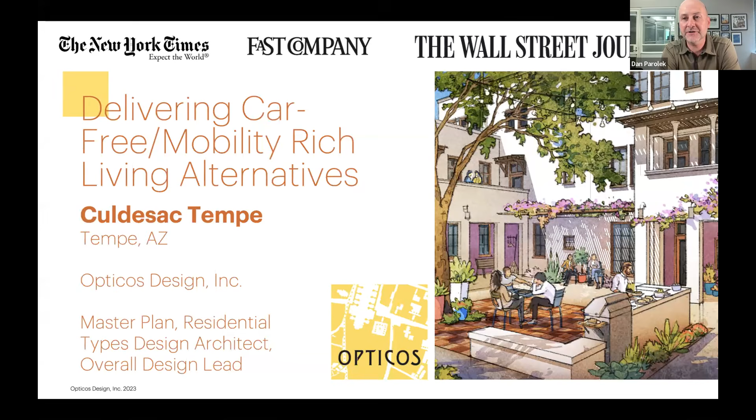Kudos to Ryan Johnson and Jeff Behrens, the founders of Culdesac, for having this vision to not just create a car-free neighborhood like we did in this and Eric's doing in Atlanta, but they have this much bigger vision of actually delivering a car-free city ultimately, which is really exciting to think about.

I'm actually going to start with a video, and I think this should work, because this project is becoming a reality. This is a video from about a month ago, so I thought this would be good to show so that people get a good sense of the overview of where the project's currently at. It starts with this view over the Smith Martin Light Rail Station at the mixed use center of the project.

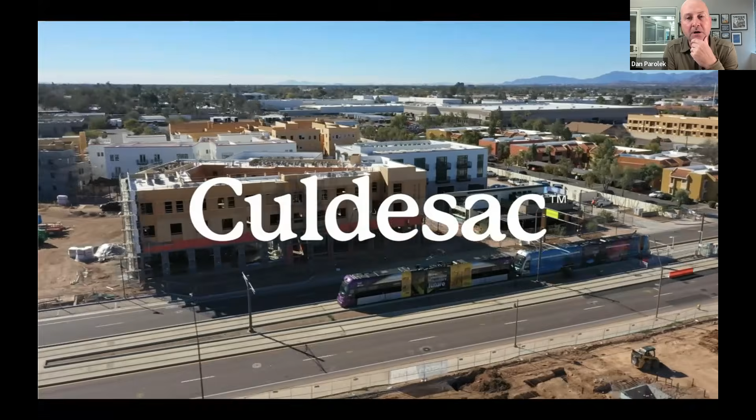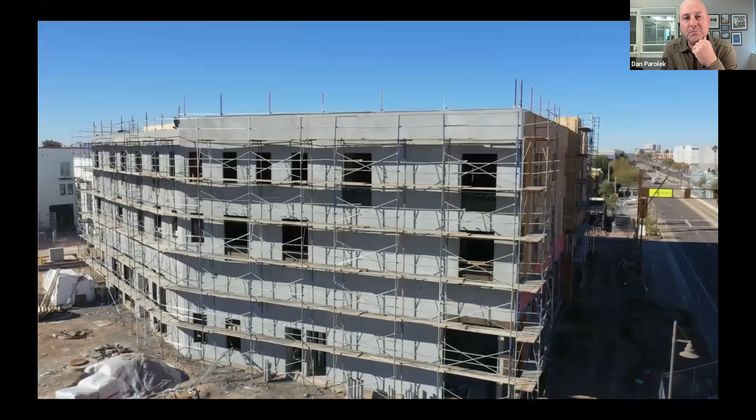The 3 mixed use buildings from the original plan are mostly completed. One of them will be occupied sometime in the next month as the first residents start to move into the project. The project is about 2 miles from downtown Tempe, which is also where ASU's main campus is.

The restaurant in this image is actually Cocina Chiwas, and it's now open. I had a wonderful dinner there last week at a ULI conference in Phoenix and met the chef. This building will have an 8,000 square foot market on the ground floor, occupying that space sometime in the next couple of months.

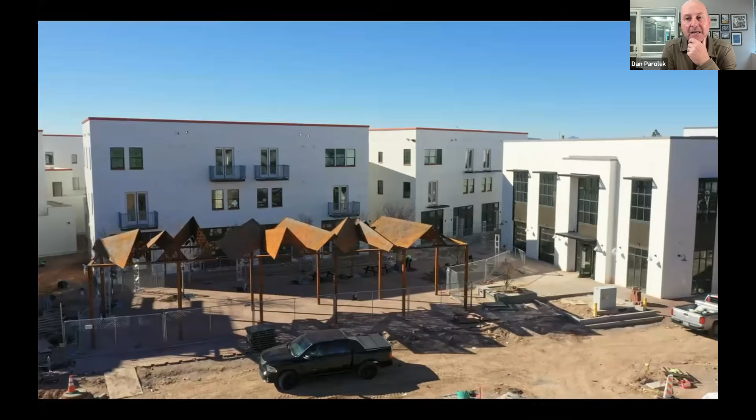You'll notice the architecture is purposefully restrained, and I'll talk more about that in my slides. This is the main plaza space with the beautiful shade pavilion done by a local artist. These are the live-work units.

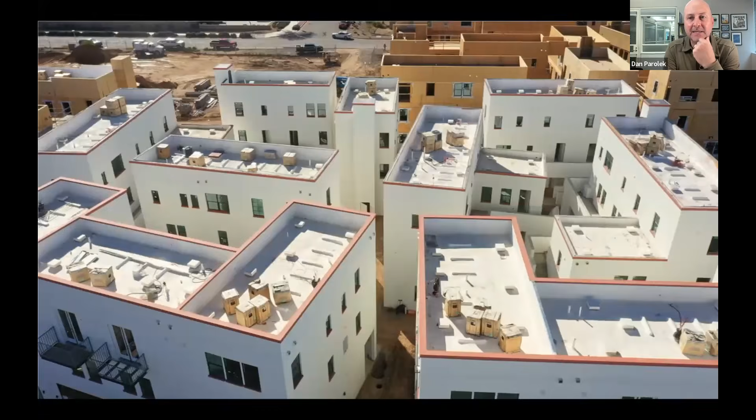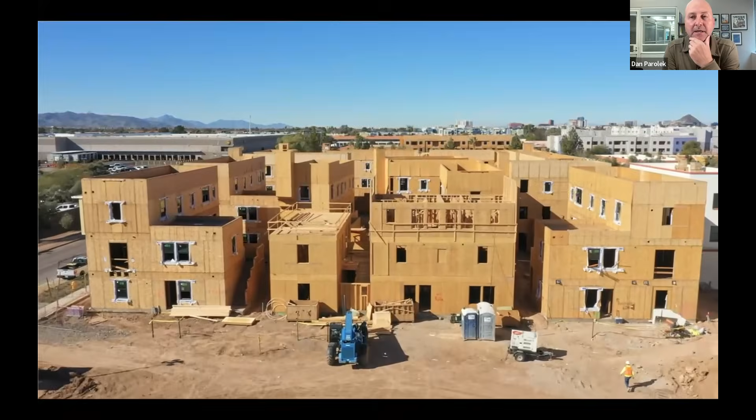This is just an image going into the inner block courtyard spaces, which are really starting to feel fantastic. The trees were starting to be put in last week or two weeks ago when I was out there, so it was really starting to feel like the images and the design intent that our design team had.

Local artists are a really key part of the programming, reinforcing the creative environment and sense of community in this project. So you can see...

I'll give you some of the numbers, but the first couple of phases are almost completed, and as I mentioned earlier, the first tenants are going to move in. I have this broken down into a series of about 4 sections.

The first one is just the idea, and I won't take credit for it. This is Culdesac, Jeff and Ryan's big idea, and these are a couple of slides from them. Creating a built environment designed from the ground up for shared mobility. Car-free is often how we frame this conversation, but 'mobility rich' is another great way to be thinking about and communicating it.

One of the really amazing things the Culdesac team has done to deliver this mobility-rich living experience is establish partnerships with local mobility companies and agencies, delivering up to about $3,000 in annual value or discounts for their residents - discounted Lyft memberships, discounted transit passes, discounted car share, and bike and scooter share. It's amazing they're thinking this way, not just providing car-free living but actually delivering those mobility choices to residents.

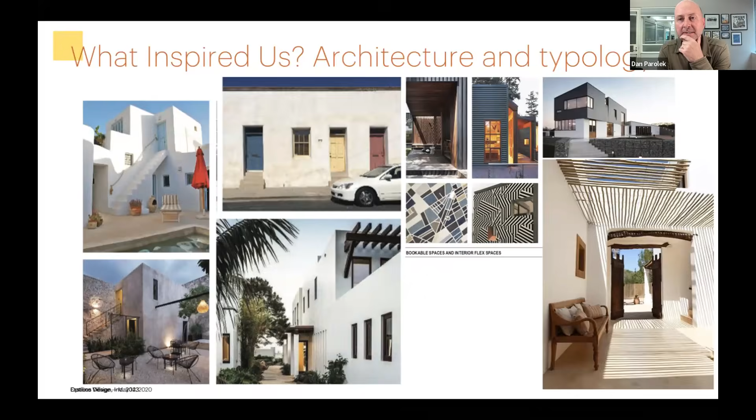I wanted to show this because I discovered this architect, the Egyptian architect Hassan Fathy - our team did - just really beautiful, desert-responsive buildings that we studied as we explored this project.

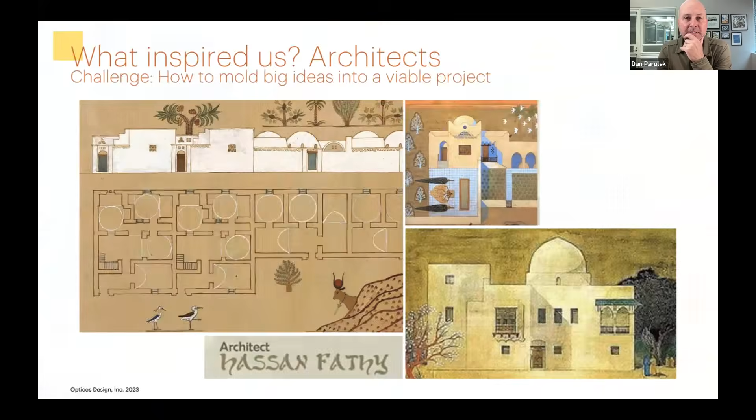From an urbanism standpoint, I think the really narrow, informal, organic, pedestrian ways that exist in all historic communities around the world, and really thoughtful public spaces that respond to the desert climate.

The team also gravitated toward really looking at this trend of beautiful painted signage and public art to reinforce a strong sense of place and a brand for the project.

In terms of the desert-responsive urbanism, obviously in a place like Phoenix with such an extreme climate, it makes complete sense, especially when you're removing cars from the equation, that the urbanism responds to that extreme desert climate.

The project site is about 16 acres, with just a little over 600 units - so 40 dwelling units per acre. It would have been really easy for Culdesac to say, hey, we want to double that and go up to 5 to 7 stories.

Their vision for this project, started 4 years ago, was a 2 to 3 story walk up neighborhood, and we were easily able to achieve that 40 dwelling units per acre in a combination of 2 to 3 stories. There are 0 residential parking spaces, but there are parking spaces for the commercial and food and beverage tenants in the project.

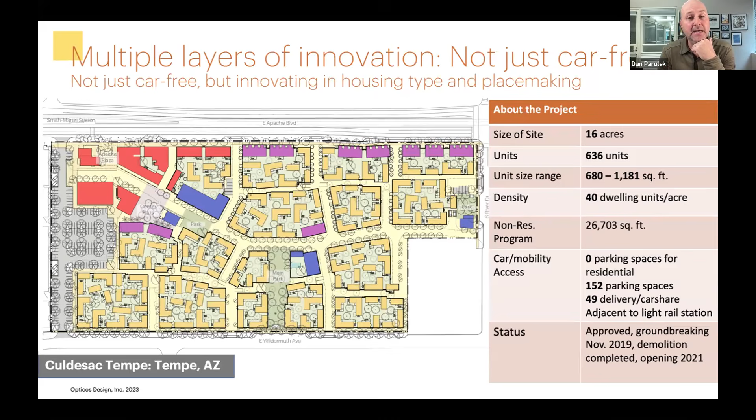One of the organizing elements of this plan is this primary paseo that goes east and west. That was partly driven by the location of existing utilities from previous structures on the site, but also driven in terms of its width by fire access and emergency access to the project area.

I'll show you a diagram of the emergency access plan, but we delivered about a 60-page document to the fire chief to walk him through how each one of these buildings would be accessed in case of a fire. You can see the really organic block typologies, and I'm going to talk more about that.

The narrow paseos deliver what we call a series of theatrical events as you're walking, biking, or scooting your way through the project from one end to the other.

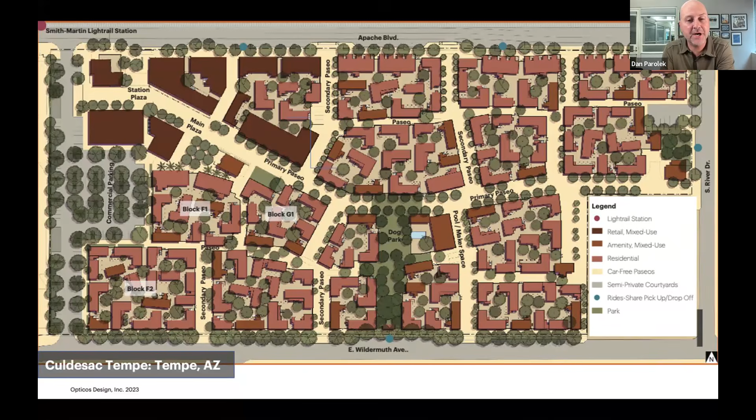This is the primary east-west paseo. We called it the spine. In the design rounds, it terminates at the station in the Cocina Chiwas restaurant.

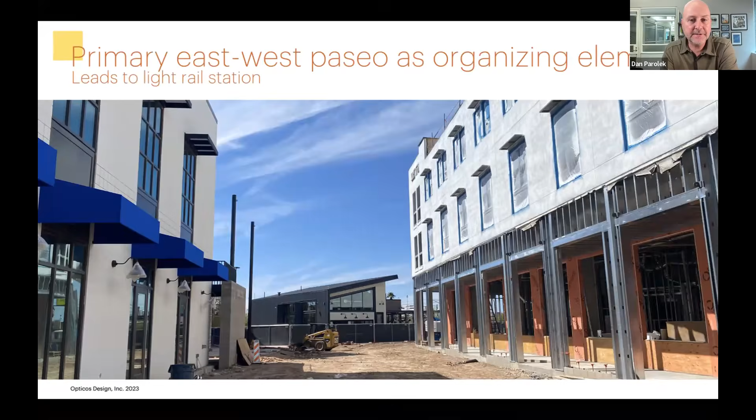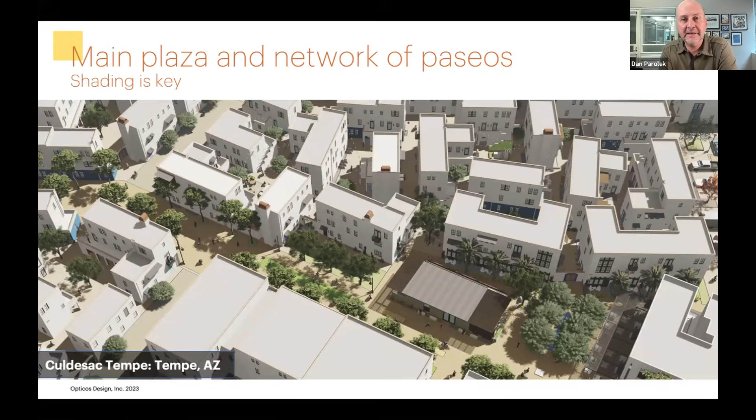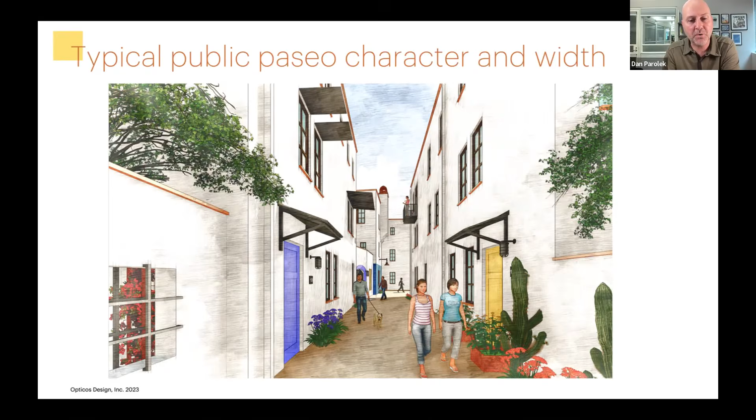These are some images of a typical primary public paseo, about 8 to 10 feet from building face to building face, activated by frequent entries into the units. Every single unit has direct access to a paseo, as well as to the inner block courtyard spaces.

This is the passage that goes from the main plaza space into the community and leads to the network of paseos. Here's the fire access diagram - you can see we wanted to keep the paseos as narrow as possible, so we were thoughtful about creating truncated access routes for emergency and fire vehicles, rather than just creating wide paseos.

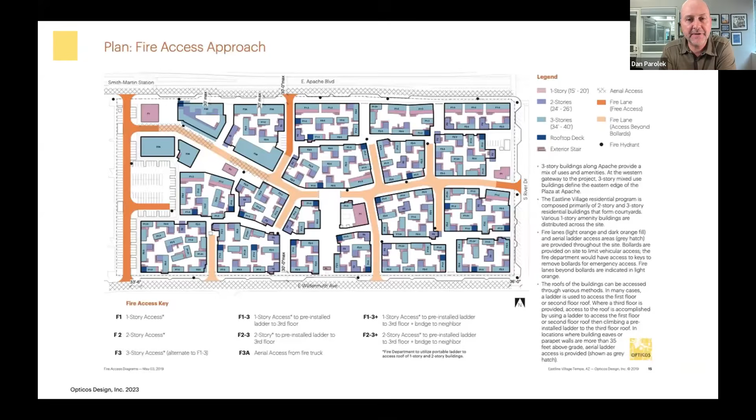We really spent a lot of time thinking about this access, working with the fire chief and his team to make sure they were comfortable with the routes we were providing.

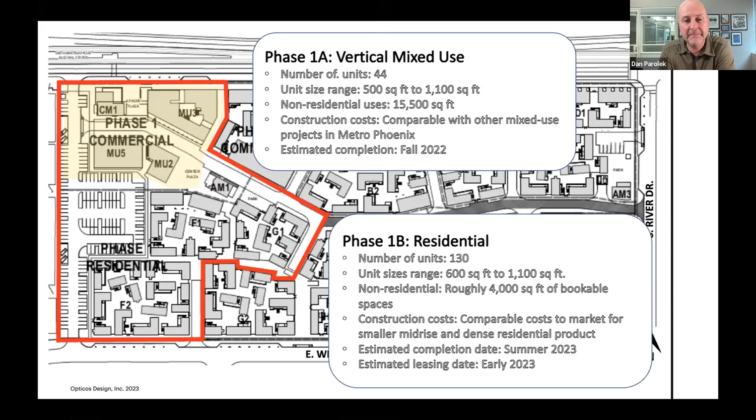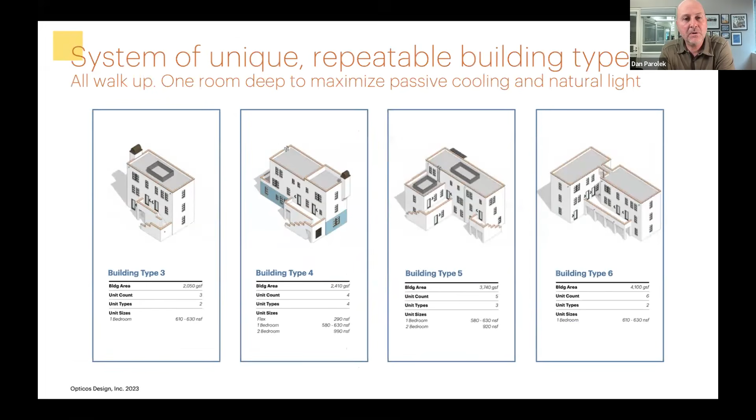Housing and block types, once again desert responsive in approach, but we created a system of unique but repeatable building types. They're all walk-up, none have internal corridors, and they're all one room deep to maximize natural light and passive cooling. The buildings were intended to be organized around interblock courtyard spaces.

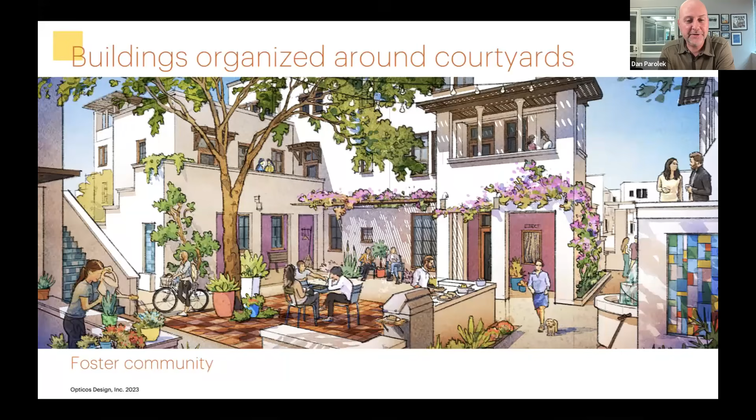This seems to be most people's favorite image of the project to date. Hopefully it'll be replaced by a photograph within the next year with some landscaping and people in it.

Those types are organized to create blocks that have a network and hierarchy of courtyard spaces. Every block has a primary courtyard bigger than the rest, and then a series of secondary and tertiary courtyards connected by narrow passageways.

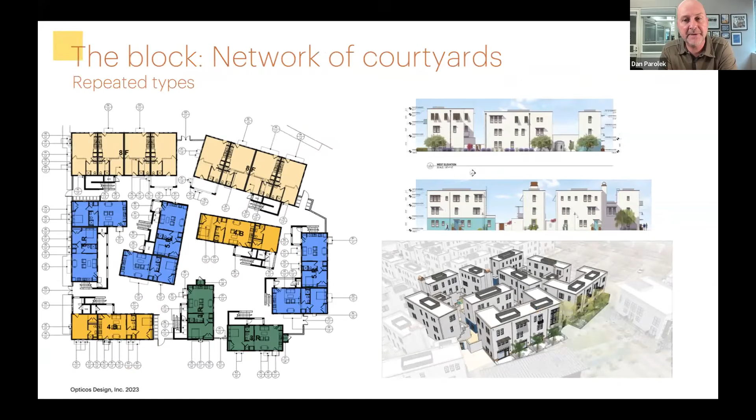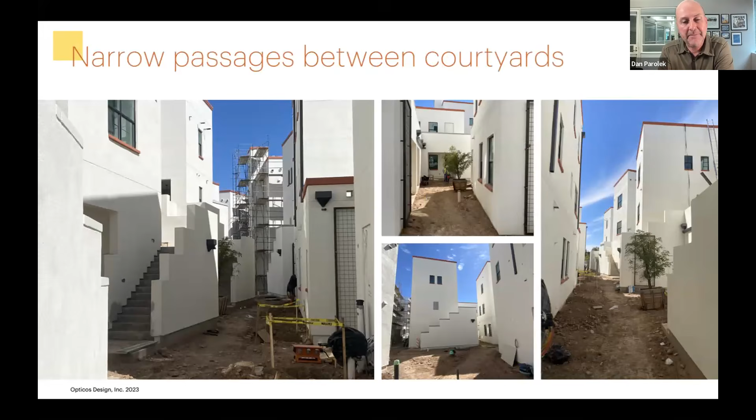In terms of the architecture, I mentioned this earlier, but I wanted to note we really challenged ourselves to deliver a thoughtfully restrained architecture. It's fairly similar to the precedents shown in that imagery, whether in the barrio in Tucson or a Greek or Egyptian village.

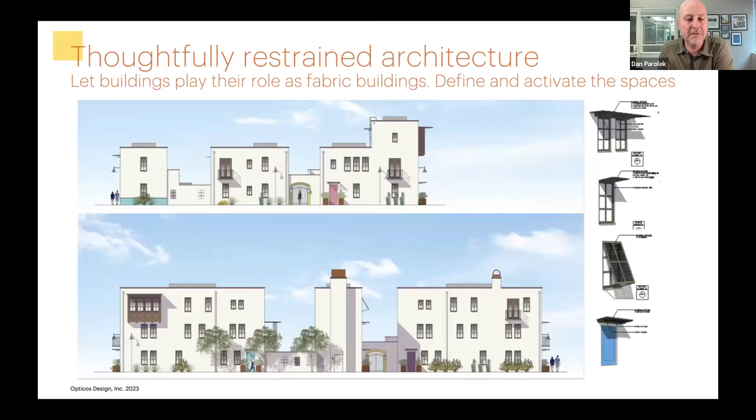And it's really important that it just lets the buildings play their role as fabric buildings and to define and activate the public spaces. In terms of the last section, I just wanted to talk a little bit about the community.

This is a piece that people don't really know that much about typically. There were a number of really great tenants, including the Street Corner Urban Market, Cocina Chiwas, and the Firecreek Coffee Company, that have leases - a great curating the Culdesac team's part to get these tenants in and provide these amenities, as part of delivering that walkability and sense of place.

More recently, they've been doing what they call Little Chola events every Thursday night that have local artists sell their crafts on the main plaza space. So it's a really great way to start creating that sense of place, creating it as a destination, and supporting the local artist community.

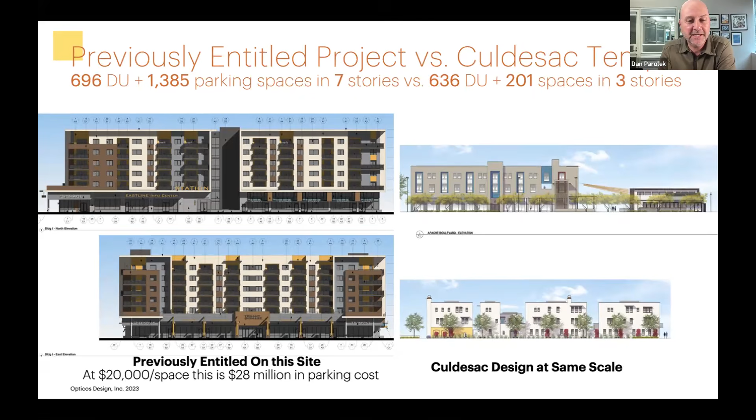So you can see how the integration of the parking really inflates the necessary scale of the buildings to get to a very similar program.

Eric, you're on mute.

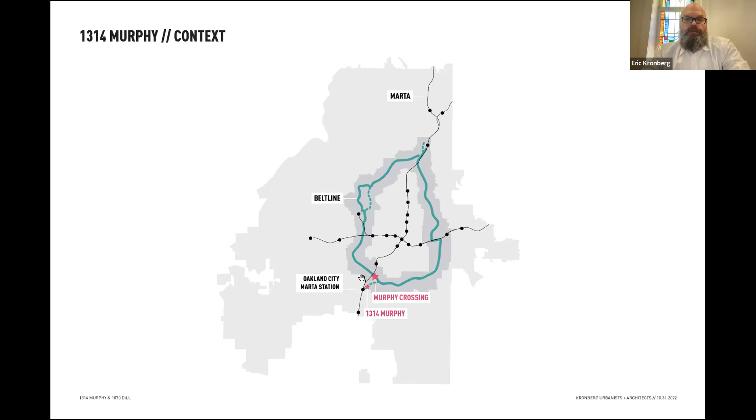Zooming into the Southwest area, there's the stuff that you may have seen in the news. There's a state farmers market, which was a public RFP. A quasi-governmental agency owns it and is allegedly trying to sell it. There's still tons of ongoing negotiations.

There's only a little bit of this I can talk about, which is the cool, big, meaty project everybody's interested in following. But the other project we've helped with that's moving along a bit faster, we call 1314 Murphy.

This is a really critical anchor for the city of Atlanta in that there's a spur, the Beltline. ABI, the quasi-government agency, owns most of this land. They don't own this little yellow piece, which is the land that Culdesac purchased. So part of this is looking at key connectivity of the Beltline.

Down here is the Oakland City MARTA station. This is how Atlanta's Beltline will connect to transit in Southwest. There's a few other options in the Northeast Central, but this is critical for the Southwest part of town. So when we talk about micromobility, we're also looking at the Beltline and larger forms of mobility in Atlanta. This is a really big part of that.

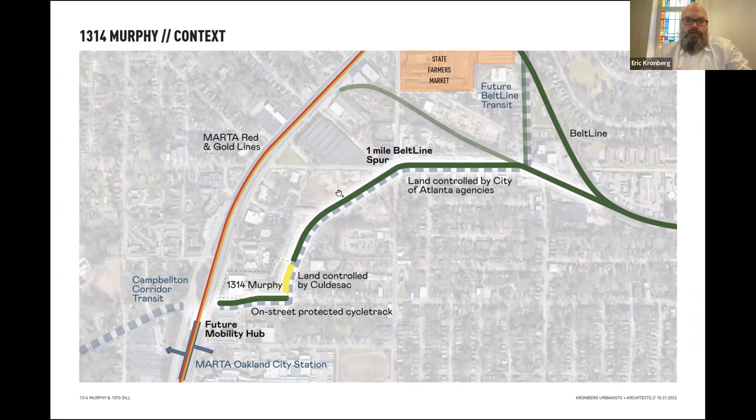And so when we talk about the state farmers market, this is the initial look.

There will have to be some adaptive reuse. This has to go through a community input process. There's definitely a goal to utilize some of the courtyard product that was refined and started in Tempe. There's definitely going to be some 4- and 5-story mixed-use buildings, some townhomes, and most likely a parking deck based on a range of trade-offs to provide adequate parking to the office, incubator, and retail spaces involved.

For site size, this is about 20 acres, and a lot of the final uses and mixes are still in flux. We haven't really been able to begin community engagement because we're still not there yet with the Beltline in terms of negotiations on the site.

It's been a long, hard road to get here with the Beltline. This is their second time taking this site to market. We were on a team the first time it went to market many years ago, but our team did not get selected. It was a political disaster for ABI. So we're hoping they can get this done with Culdesac so they can move it forward in a positive fashion.

And then again, some more renderings of activation on the ground.

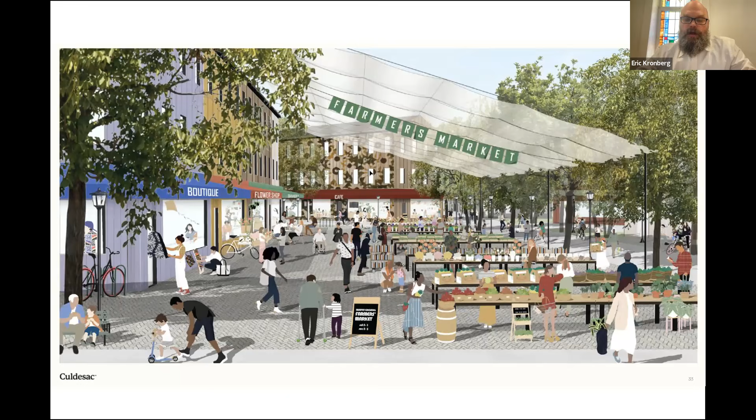There is a very significant and appropriate emphasis on small business incubation, definitely for minority business owners. So we're looking at high-level strategies for smaller spaces, how to support and activate them. This gets into tenant improvement strategies and rent subsidy strategies. But a lot of making a place appropriate to Southwest Atlanta is about inclusion and equity, and how we integrate these things to make it viable for everybody.

Coincidentally, they bought a site across the street. So we've got this 5-acre site here and then the site across the street. And just to give you a sense, Dan's metrics are great - where Culdesac started at 40 units per acre, in Tempe. Land prices, construction costs, and other pressures have got us at 120 units an acre here. So we're triple the density to make this project work.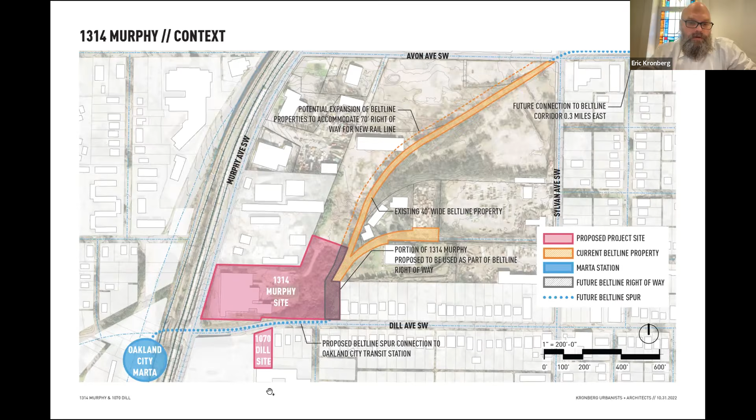So in terms of a quick site diagram breaking into phases, there will be some 5-over-2 due to basement and grading considerations for topography in this primary building. Some tightening and focusing on the courtyard product here to keep it a core component of Culdesac, but this is another 5-over-1 building in order to make this project feasible.

This is all the public Beltline spur, working through a couple different phases of how this gets activated, maintaining space for future transit, and then near-term and long-term pedestrian connectivity as well.

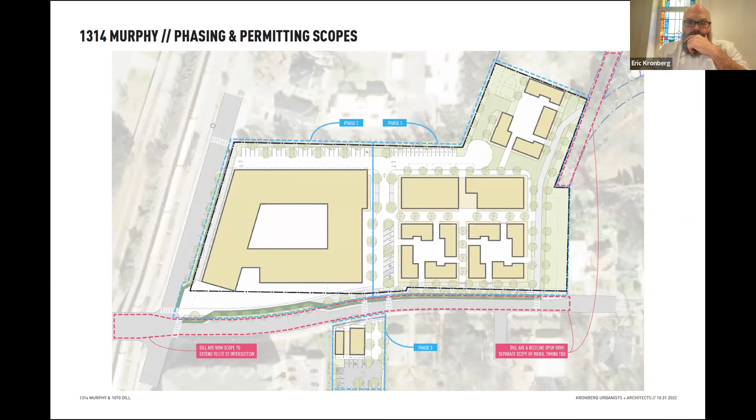Some quick diagramming looking at a lot of the bike and pedestrian connectivity. There will be connection to the train station, but we do see a lot of the coming and going coming from the bike paths here through the Beltline spur.

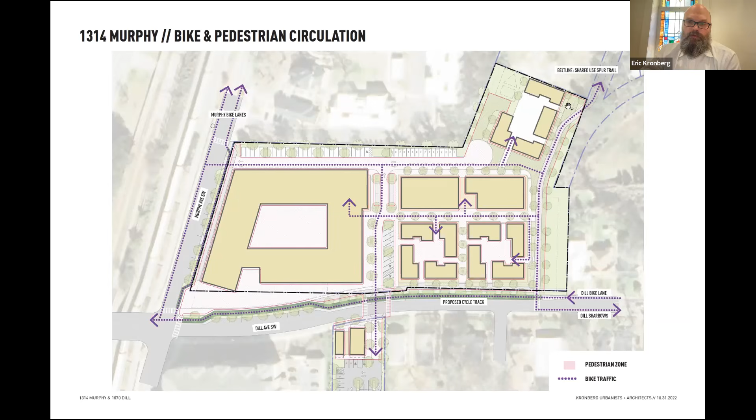And then also, Dan's had those really great fire lane diagrams, ours were a bit simpler in terms of how this works. Seeing the center as a paseo, and being really thoughtful about how we do that with limited short-term parking for business, but most of the parking is back here only for retail, out of the way of the back alley, really focusing the core on pedestrian experience.

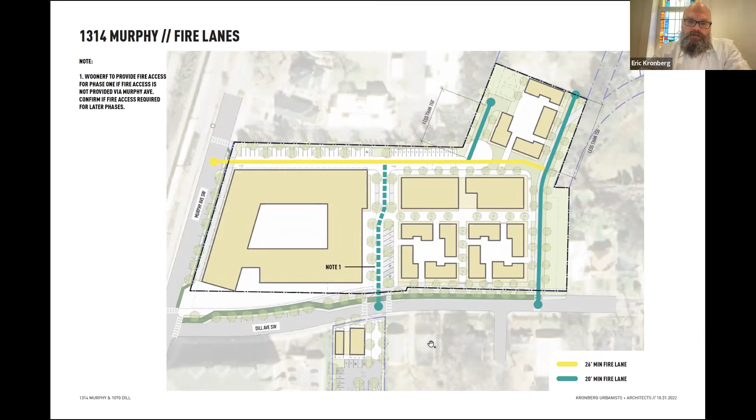A little bit of a quick diagram of retail and activation. The other core public space component is we have a bit of a bizarre right-of-way due to realignments of roads for crossing into the train tracks years ago. So we have a large public plaza that's been a large centerpiece of community conversation about how does this get activated, how do we make this amazing, and how do we do that in the public right-of-way.

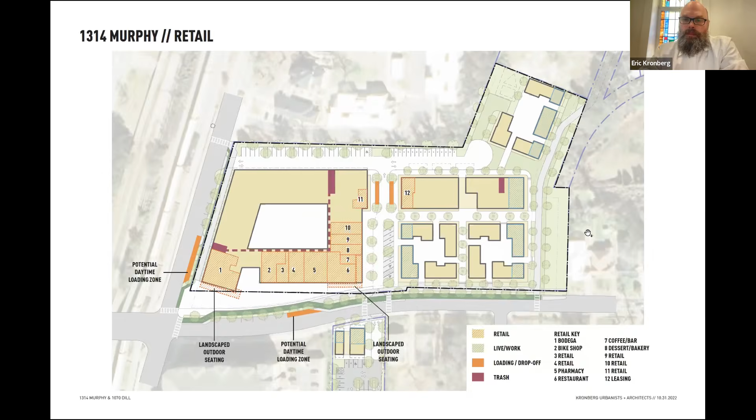So working with the city agencies to make that go as well. Again, we do have some parking, shown in pink for the commercial, trying to be thoughtful about minimizing how cars come in and relegating them to limited components of the site from a flow standpoint. Lots of bike parking distributed. One of the other key things in both projects is there's a tremendous amount of interior, safe, secure bike parking, with a tremendous focus on e-bike charging for the interior connection too. This is just a diagram of guest parking — we ended up with 144 guest parking spaces for bikes, and we were targeting around 1 bike space per unit for interior parking in addition to that.

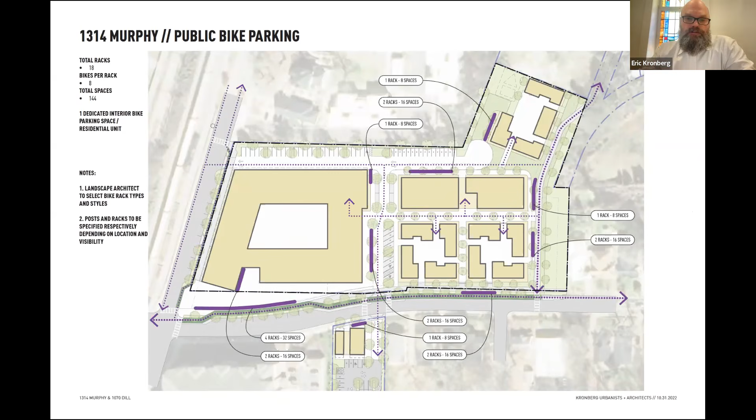Again, a couple quick inspiration images — typical woonerf for that center space, looking at good paving, good street engagement for where that is headed. And then some early renderings of the plaza activation.

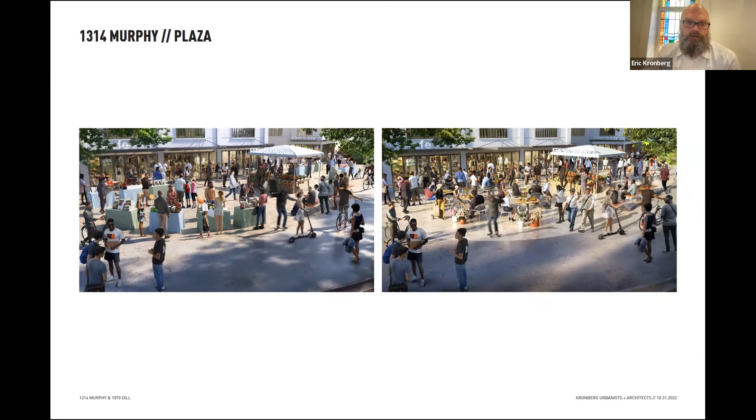Culdesac has done a great job in Tempe with that tactical activation to get people engaged, and the goal is for this plaza to be the long-term site for activation as part of this project's development. Also knowing that this is going to work as a bit of an archipelago with a connection to the larger Murphy Crossing site, which is the State Farmers Market, the main 20-acre site.

Some early concept renderings, really just looking at making sure there's good massing and good engagement for the retail to invite the plaza, and looking at connections for the multifamily. Keeping it simple, keeping it staged, trying to focus on better materials, but helping them get an initial concept to work through approvals and into site permitting.

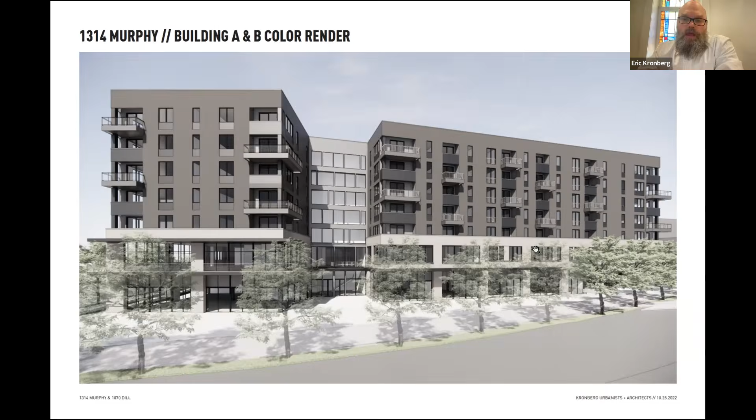One of the things here is some tighter passageways, trying to be cognizant of scale of how these buildings are going to integrate as an early stage design component. This is some 3-story courtyard product, but in order to get some of these densities, the 3-story courtyard product not only had to be tightened, but we ended up with some partial 4-story components — one, to get the unit yield, but also to make sure we get adequate light and air coming into these courtyards.

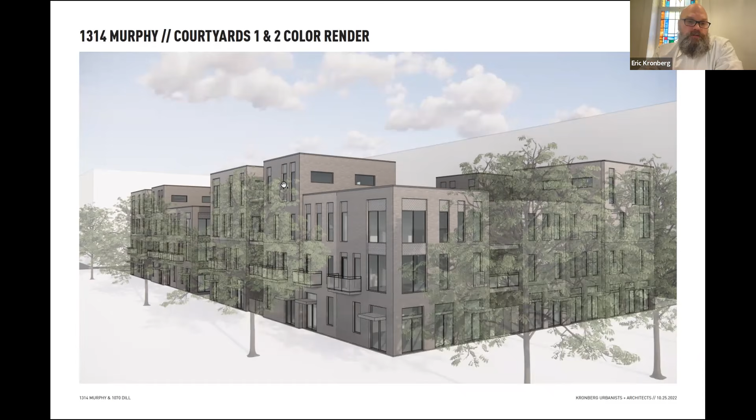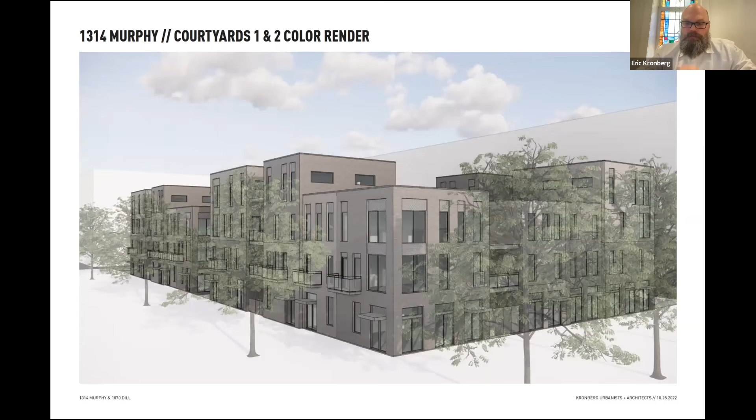This is 2 stories of flats, and then up to the 3rd floor you've got 2-story units above to get a little bit of extra density. So a lot of trade-offs and balancing when you're asked to go from 40 units an acre to 120 — what do you do to make that fit in and stay as true to the brand as possible? And also up in Culdesac, realize that with construction and land prices, some of the amazing stuff Dan got to do at Tempe with those lower density things may just not be feasible moving forward in future projects.